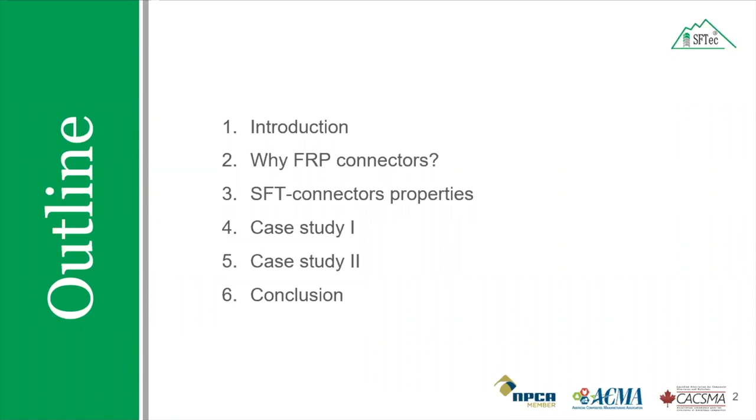Thank you, Rick, for the brief introduction. Let's start with today's presentation. It is a very short webinar on the introduction to fiber reinforced polymer connectors. Through this presentation, I will give a brief overview of the properties of SFTec connectors and its application, and I will go through 2 case studies to elaborate its present uses.

Before starting our main presentation, I would like to introduce our company, SFTec. Our products are mostly designed in Canada and manufactured in China by Sandok Industries Co. Limited, who specialize in manufacturing fiber reinforced polymer products. We work with national and international engineering firms, through the design process, helping them with fiber reinforced polymer design standards, whether in Canada or the United States. Our focus is on parking facilities, water treatment plants, retaining walls, mainly made of glass fiber reinforced polymers, and also carbon strap applications.

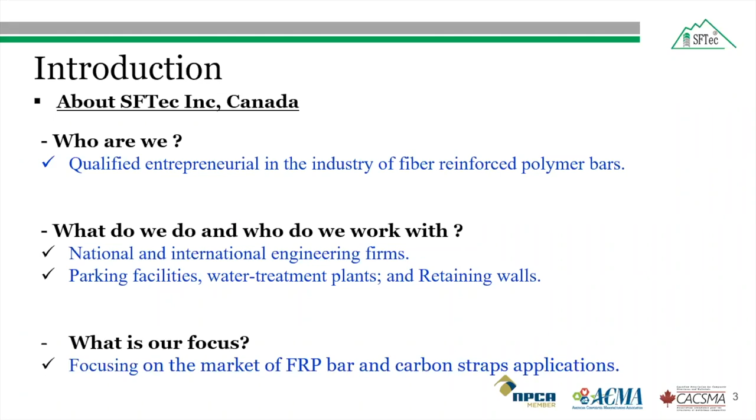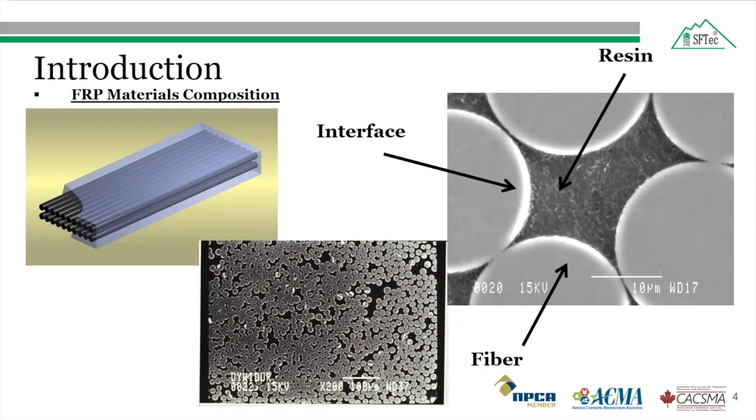The SFTec FRP bar is made of composite materials, either fiberglass or carbon fiber. It is manufactured by a process called pultrusion using a mix of recycled fiber and resins. Here the figure shows a microscopic view of the FRP bar.

There are 3 different types of fiber reinforced polymer bars available in the market. Now it is 4, but I am presenting only 3 here: carbon, aramid, and glass. The 4th one is basalt, on which research is still going on. The stress strain plot shows how these FRP bars compare with steel bar. Two points should be noted from this plot: first, glass fiber reinforced polymer has lower strength compared to the other 2 FRP bars; second, the strength of all fiber reinforced polymer bars is higher than the steel bar. However, their behavior is linear elastic up to failure.

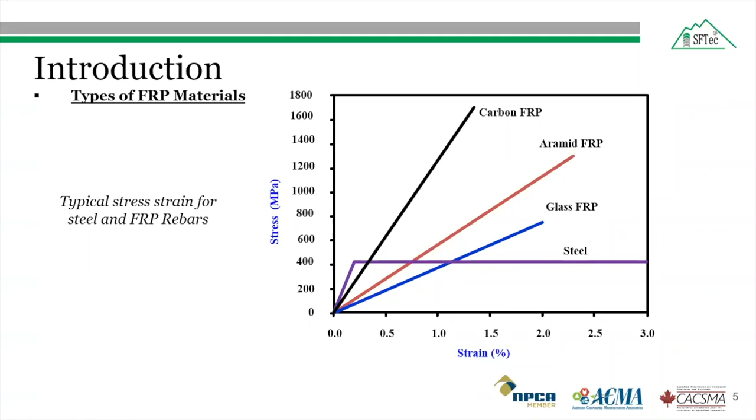In our products, we have different types of FRP products depending on project requirements. Some of the FRP bars we produce are straight bars, spiral, and stirrups for transverse reinforcement, bent bars, and glass fiber reinforced polymer shear connector, which is the topic of today's talk. The glass fiber reinforced polymer bar is widely used due to its production cost and better tensile strain compared to the other fiber reinforced polymer bars. That's why most of our products are made from glass fibers.

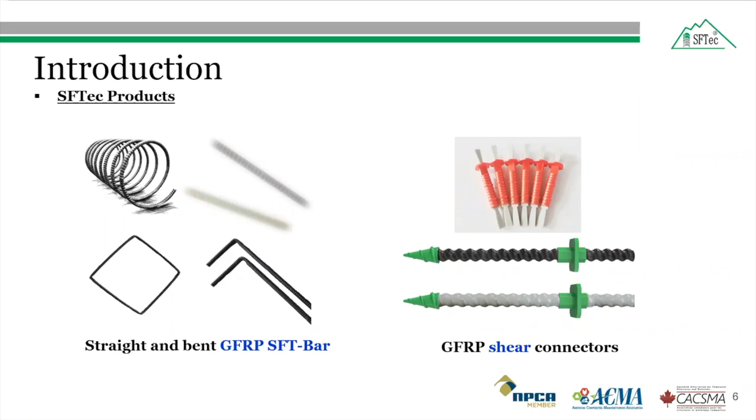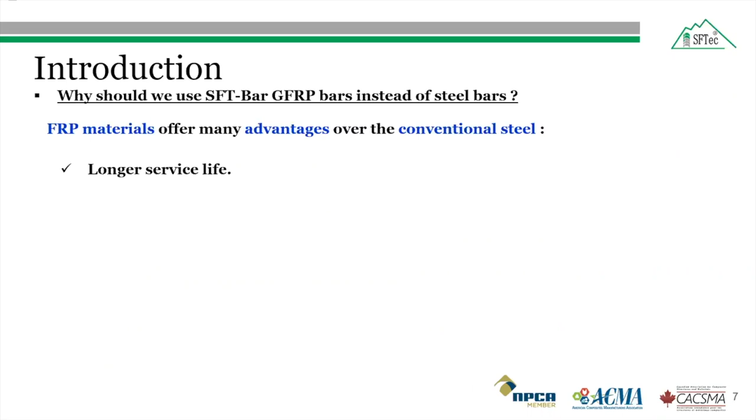Some of the advantages of the SFTec glass fiber bar over conventional steel bars are: it has a longer service life because of its corrosion resistance and therefore improved durability in harsh marine environments, such as construction near coastal areas, and in North America's cold climate.

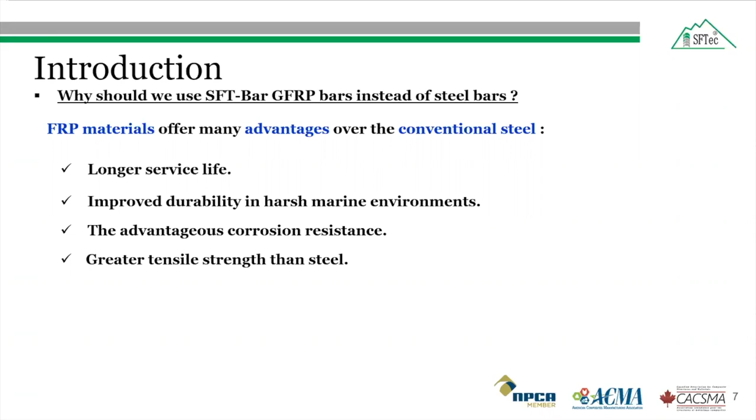The FRP bars have better resistance against corrosion compared to the steel bars. As mentioned earlier, the tensile strength of the FRP bars is 2 to 3 times more than that of the steel bar. FRP bars are also lighter due to their low density compared to steel bar.

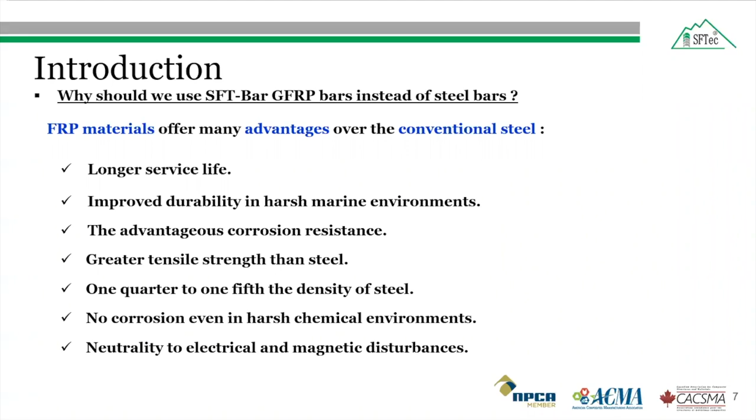Due to corrosion resistance, FRP bars are good for harsh chemical environments as well. They are also neutral to electrical and magnetic disturbances, making them useful for applications such as airports, military applications, MRI rooms, and hospitals.

Some selected field applications of SFTec FRP bars we have already done in Canada include a GFRP reinforced concrete waffle flooring slab designed with SFTec glass fiber reinforced polymer bar, which was built last year in Halifax, Nova Scotia.

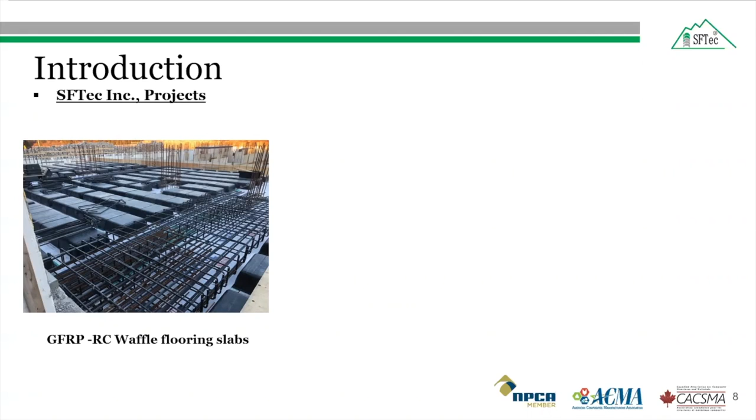It can also be used for slab on grade. It is a non-structural slab, not a one-to-one replacement, and it saves a lot of money compared to the steel bar in terms of labor and transportation.

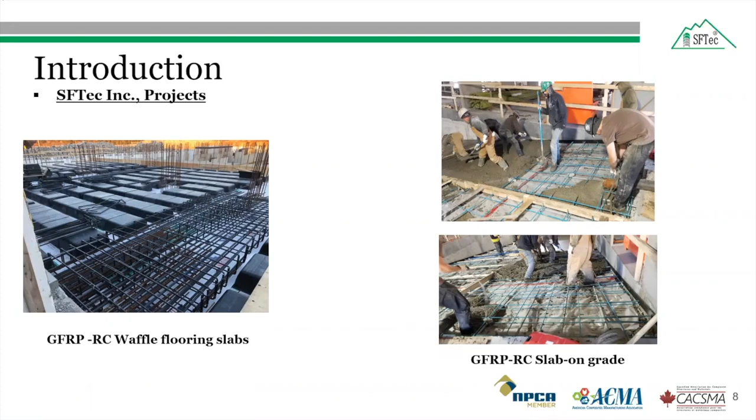Another project shows cast in situ precast sandwich panels, where they used our glass fiber reinforced polymer bars as reinforcement. This was built in China.

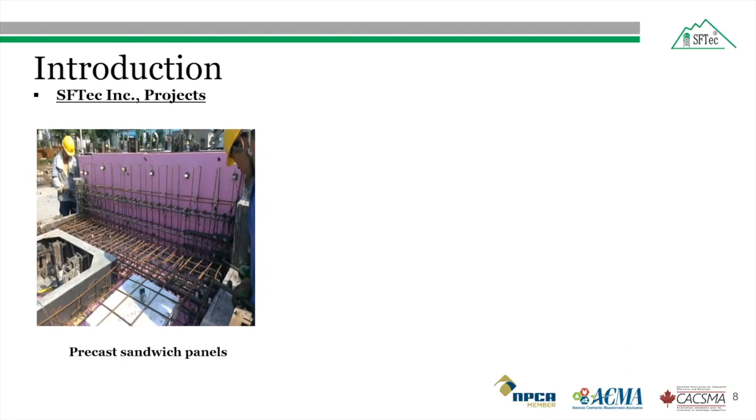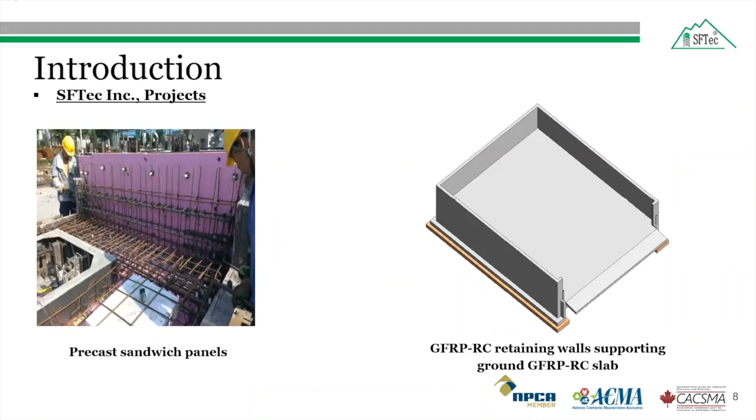On the right is a retaining wall built for the city of Montreal, designed to hold snow with de-icing salts during the winter. They built this retaining wall with SFTec glass fiber reinforced polymer bar, which provided resistance against the chemicals used in the de-icing salts.

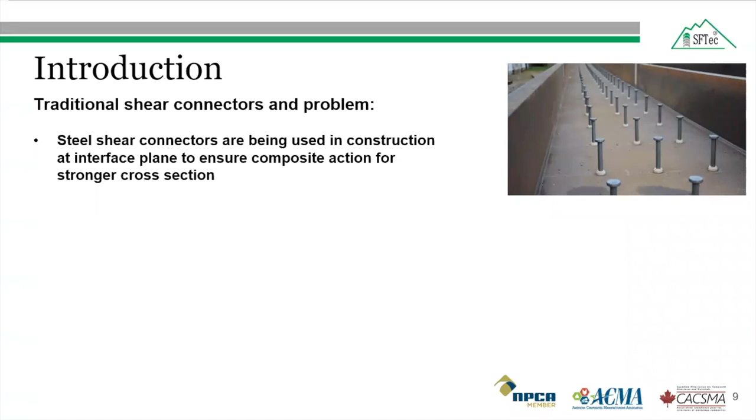Traditional steel shear connectors, also called studs, are used in bridge construction at the interface between the cast in place deck slab and the precast girder to ensure composite action for a stronger cross section. But as we know, in North American countries, bridge deck slabs corrode over time due to environmental conditions.

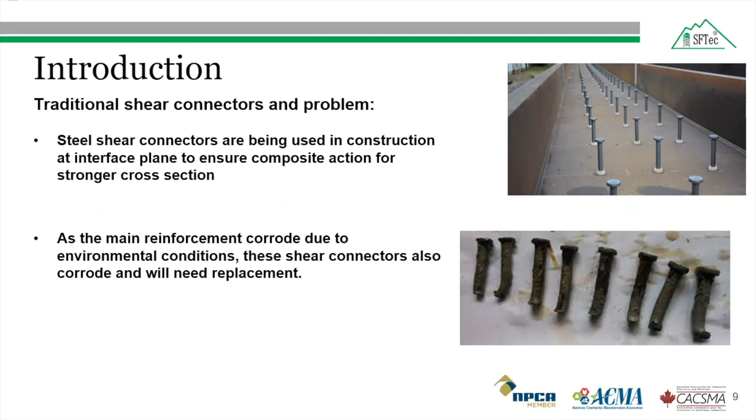These shear connectors also corrode and will need replacement, especially in Canadian winters where de-icing salt is used. The corrosion of steel shear connectors results in gradual loss of composite behavior and strength of the composite action. So fiber reinforced polymer connectors have shown to be an effective alternative to conventional steel connectors due to their resistance against corrosion.

It is lightweight, non-conductive, and magnetic free. We'll discuss why the non-conductivity of FRP is helpful.

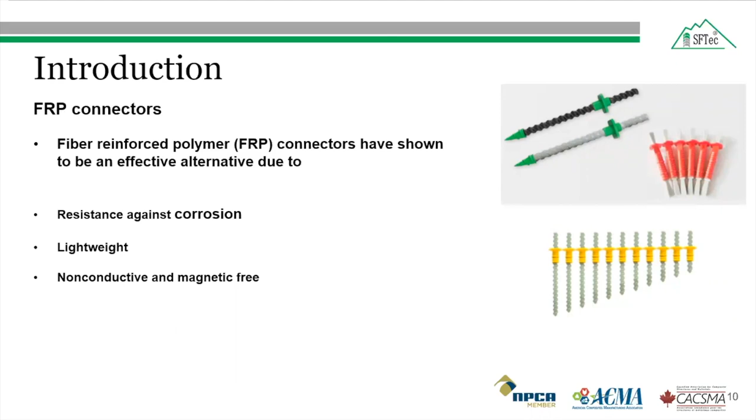With SF-Tech connectors, we generally have 3 different types. Type 1 is the SF-Tech thread connector, with a tensile strength of 700 megapascal, 180 megapascal shear strength, and tensile modulus of 65 gigapascal.

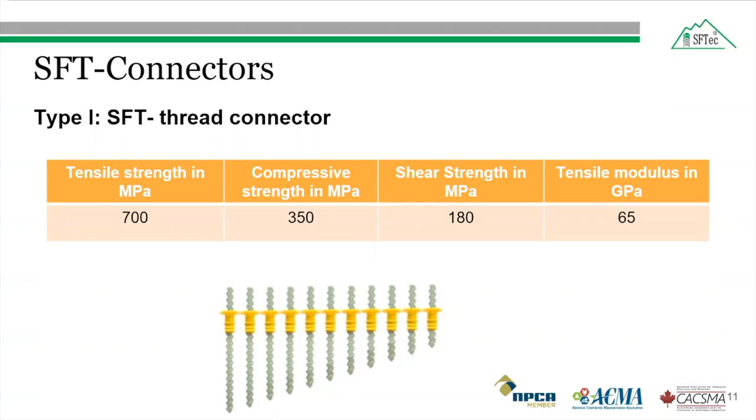The second type of SF-Tech connector is the SF-Tech flat bar, with tensile strength of 600 megapascal, shear strength of 120 megapascal, and tensile modulus of 45 gigapascal.

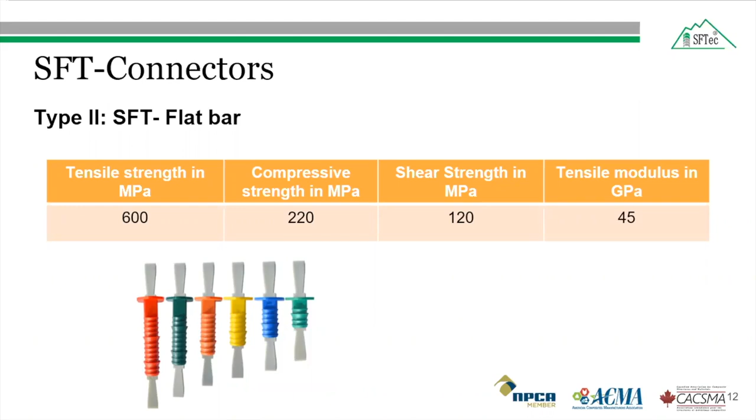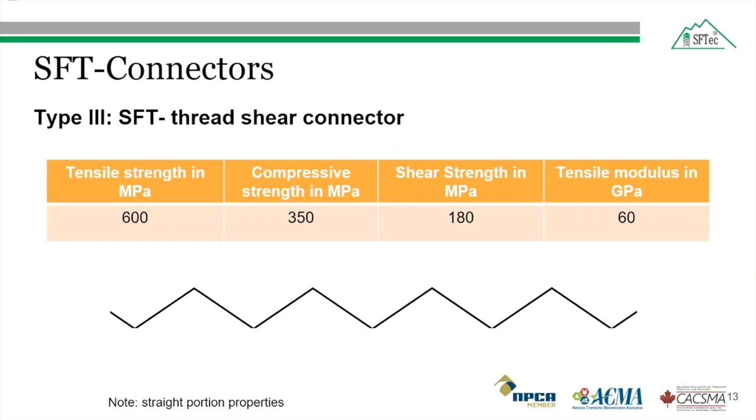Finally, the third type is the SF-Tech thread shear connector, which has a tensile strength of 600 megapascal and tensile modulus of 60 gigapascal. Its structure is like a truss. It is worth mentioning that all SF-Tech connectors are made of fiberglass.

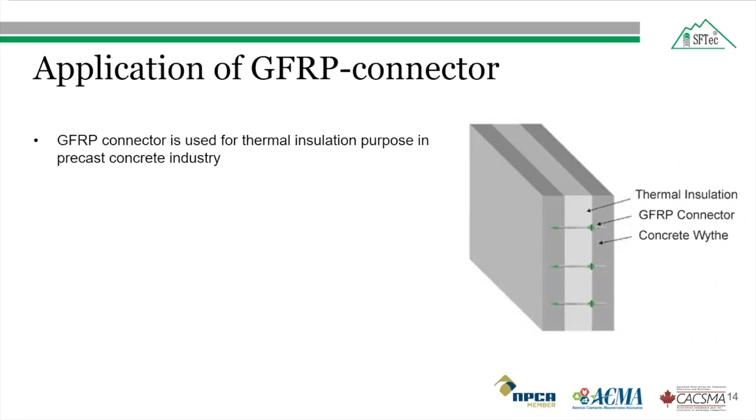The GFRP connectors are used for thermal insulation purposes in the precast concrete industry, such as plant precast and cast in place projects. The precast concrete sandwich wall is composed of an inside layer, outside layer, and thermal insulation, which is generally between the 2 concrete wythes.

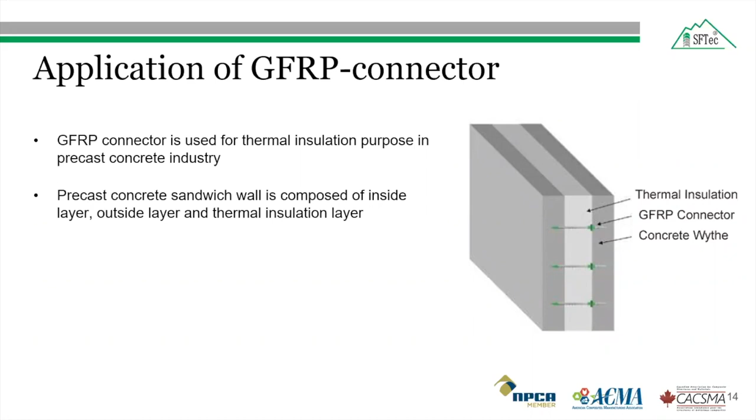The FRP thermal insulation connectors are used to connect these 3 layers, and they can not only bear the weight of the insulation and outside layer, but also bear wind load, earthquake load, and other kinds of loads.

There are two cases presented today: one deals with the thermal resistance of the GFRP connectors, and the other with the shear capacity.

The first case study is about the experimental investigation of thermal properties of insulated concrete sandwich panels with fiberglass shear connectors. As we know, increasing economic and environmental cost of space heating and cooling have generated renewed interest in improving the thermal resistance of building envelopes.

At the same time, rising construction costs are driving designers to select prefabricated elements which can be constructed with higher quality control and in less time than traditional construction. Precast concrete sandwich panels, also known as insulated concrete walls, are thermally efficient prefabricated elements that can address both of these needs.

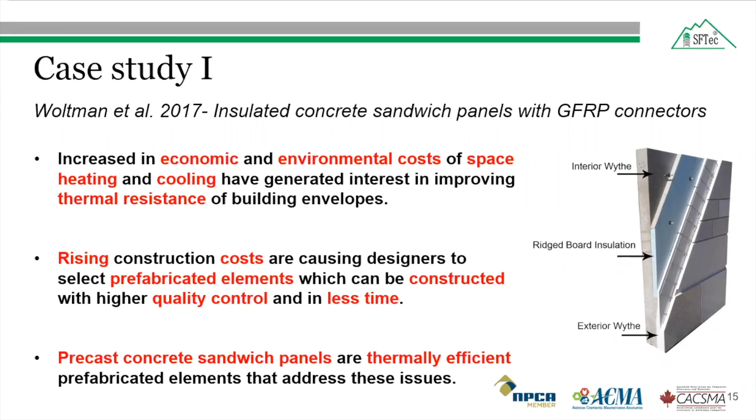Steel connectors are widely used in the industry, but also have the highest thermal conductivity of the connector materials available. Concrete is also used to connect the two wythes in full composite panels. However, a large area of concrete is required, which creates a large thermal bridge.

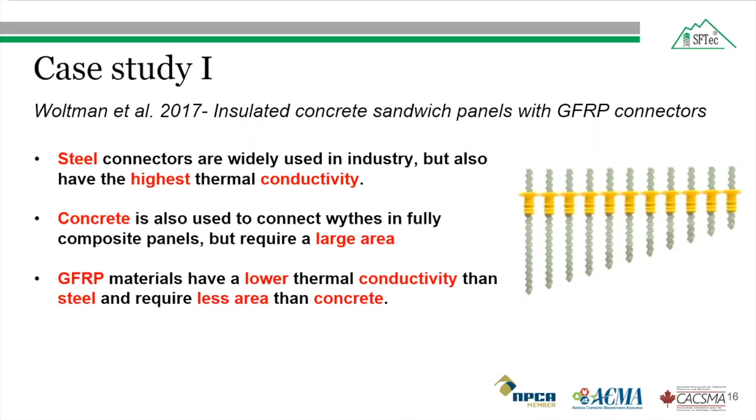Over the past two decades, rising energy prices have encouraged the development of alternatives to traditional steel reinforced design. Glass fiber reinforced polymer, or fiberglass, materials have significantly lower thermal conductivity than steel, generally ranging from 1/60th to 1/30th that of steel, and require less bearing area than concrete to hold the two wythes together. In case study 1, the test setup was a hot box apparatus used to determine the thermal behavior of the insulated concrete sandwich panel.

The test cell had two chambers as shown in this figure: a cold chamber and a hot chamber. The cold chamber, also known as the climate chamber, had a temperature of minus 4.3 degrees Celsius. The other chamber, the hot chamber, also called the metering chamber, was at room temperature of 25 degrees Celsius.

Both chambers were made up of precast concrete box culverts with octagonal cross section, as shown in this figure. The space between these two chambers is adjustable for various thicknesses of the test panels.

This sandwich panel is the test specimen used for testing, and a circulating fan, adjacent to the heater, was used to increase the air velocity inside the hot chamber so that the air velocity was consistent across the surface of the panel.

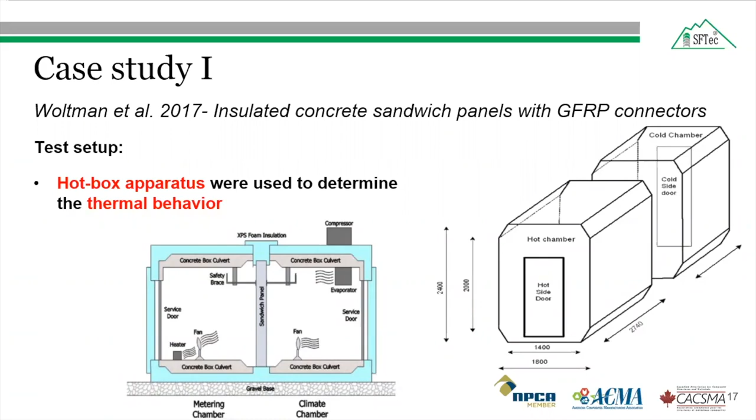The test panels, as shown in this figure, had two wythes, one exterior and one interior, separated by insulation foam and shear connectors. The shear connectors were used to connect the two wythes, passing through the concrete studs.

The back of each chamber in the hot box apparatus was left open to allow the test panel to be installed. This figure shows how the test panels were installed inside the hot box.

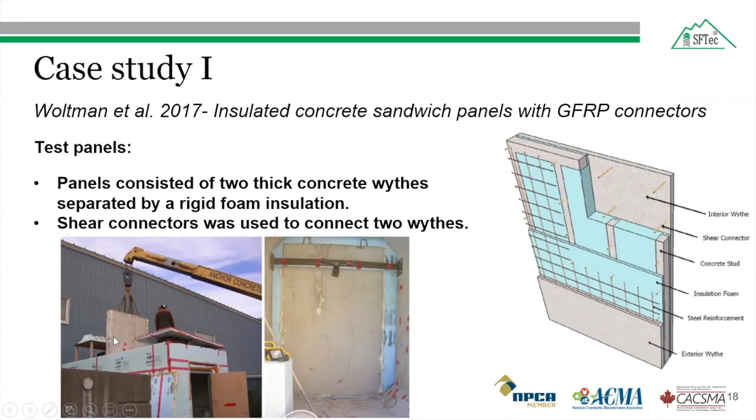The thermal resistance, or R value, is the ability of the insulation material to resist heat flow. The R value of each specimen, in square meter Kelvin per watt, can be determined from the average surface temperatures of the hot and cold sides of the panels and the amount of heat received from the metering or hot chamber.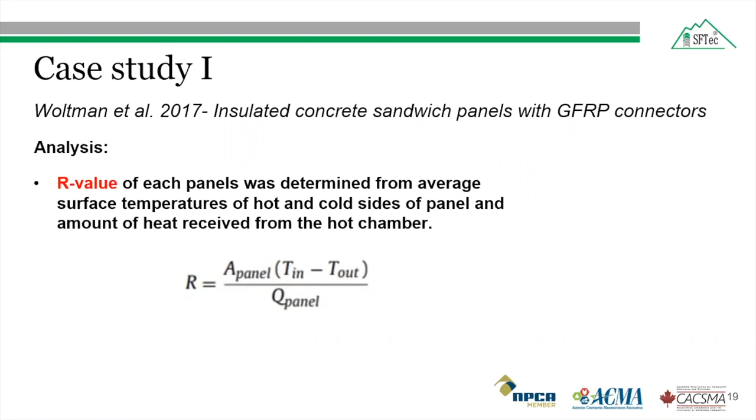In this equation, A panel is the area of the test panel, T in and T out are the surface temperatures facing the hot and cold chambers, and Q panel is the heat received by the tested wall.

Now coming to the results from case study 1, two panels were constructed with similar numbers and dimensions of shear connectors. One was reinforced with steel connectors, the other with GFRP connectors.

The GFRP connector panels, or fiberglass shear connector panels, were found to provide equivalent or better thermal resistance than the counterpart steel connector panels, due to the lower thermal conductivity of the glass fiber reinforced polymer compared to steel, which minimized the effect of thermal bridging.

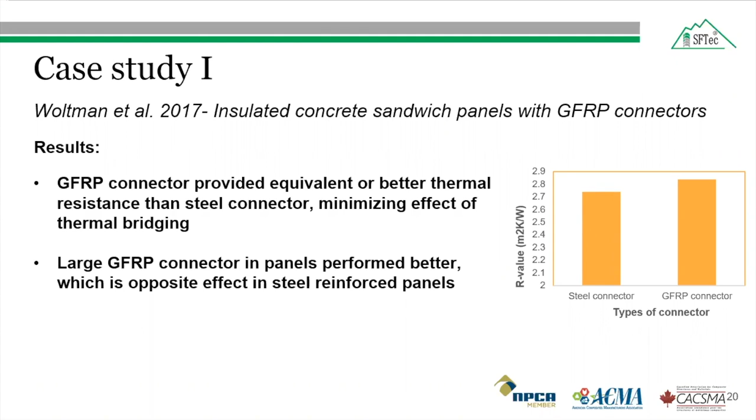The other conclusion drawn from this study was that the large glass fiber reinforced polymer connector panel resulted in a 60% increase in thermal resistance compared to the control panel, which is the steel panel reinforced with steel connectors. This result is the opposite of what we expected for steel reinforced panels, as increased connector area of steel would lead to more thermal bridging because steel has very good conductivity.

Now the second case study talks about the in-plane shear behavior of insulated precast concrete sandwich panels reinforced with corrugated GFRP connectors. As I told earlier, insulated precast concrete sandwich panel systems are widely used commercially due to their economic advantages and superior thermal and structural efficiency.

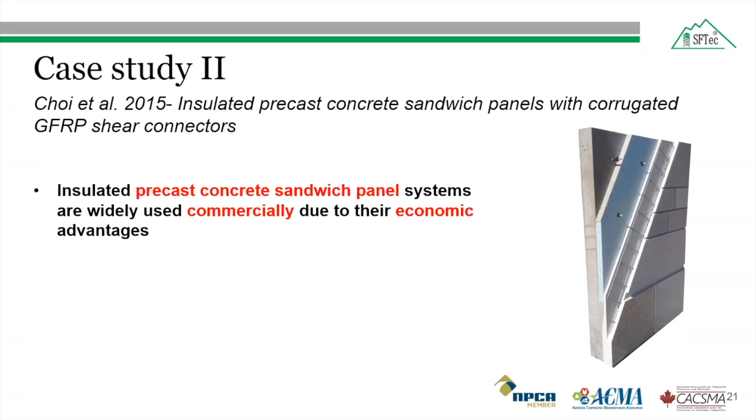As discussed, the panel consists of exterior and interior precast concrete panels separated by a layer of rigid foam insulation. The presence of the insulating layer enhances the thermal efficiency of the precast concrete sandwich panel system. The two discrete thin concrete wythes help resist applied load by changing the shear transfer mechanism of a conventional concrete wall panel. The figure below shows the glass fiber reinforced polymer shear connector that incorporates a 45-degree angle to the shear plane and is 5 millimeters thick.

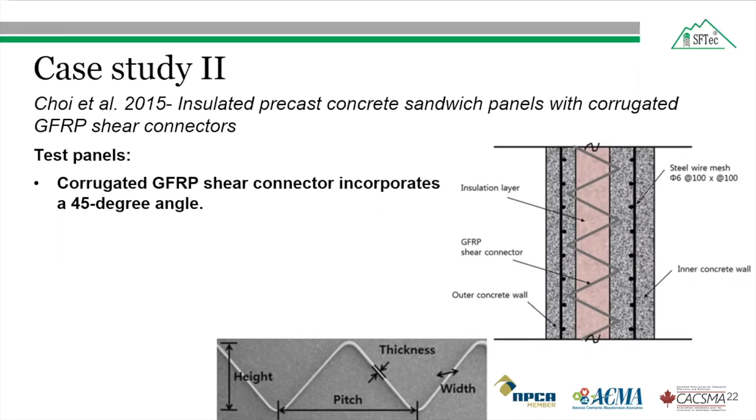A variable of the GFRP connector was used to investigate the toughness of the glass fiber reinforced polymer shear connector, varying its pitch, height, and width. The specimens were supported vertically at the bottom edges of the two concrete outer wythes on steel blocks.

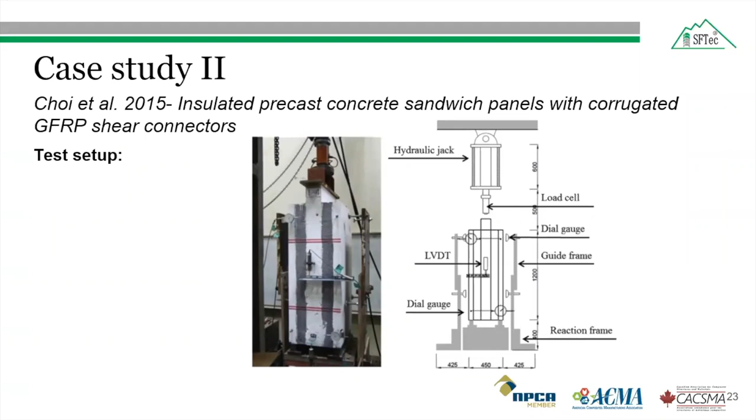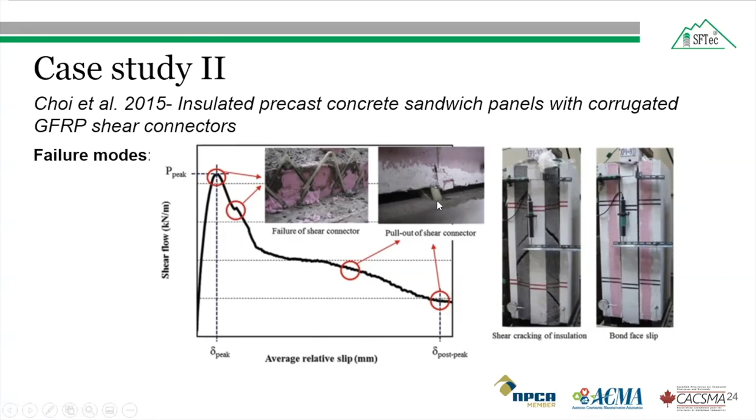A vertical load was applied through the load cell and steel block in line with a 1000 kilonewton hydraulic jack to the top surface of the inner concrete wythe to produce direct shear force across the interfaces. The failure mode after the test showed the strength of the panel reduced after maximum loading, followed by failure of the shear connector, with shear cracks in the insulation and delamination of the concrete and insulation observed. As the rate of displacement increased, the load gradually decreased. The specimen failed with pullout of the shear connectors when the embedded length was not long enough.

The results drawn from case study 2 were: the variable of the GFRP connector was used to investigate the toughness of the GFRP shear connector, its pitch and width. An increase in the width of the corrugated GFRP shear connectors tends to increase the stiffness and strength of the specimen, and with an increase in the pitch, the in-plane shear strength increases, resulting in higher tensile strength of the shear connectors.

So from these two case studies, what we found is that in the first case study, the thermal resistance of the GFRP connectors is better than the steel counterpart. Even with an increased or larger size of GFRP connector used, it will provide better thermal resistance compared to steel connectors.

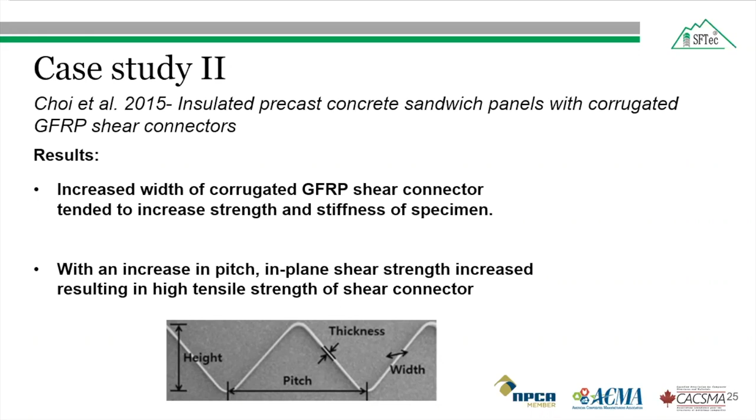And in the second, the shear strength of the GFRP connectors provides better insight into how much pitch, width, and height of the GFRP connector should be used in the precast sandwich wall so that it can provide efficient or sufficient shear strength.

So as I told earlier, we have 3 different types of FRP connectors which can be used for different construction projects, like in insulated walls, slabs, or precast elements, and these bars can be modified according to the project requirement.

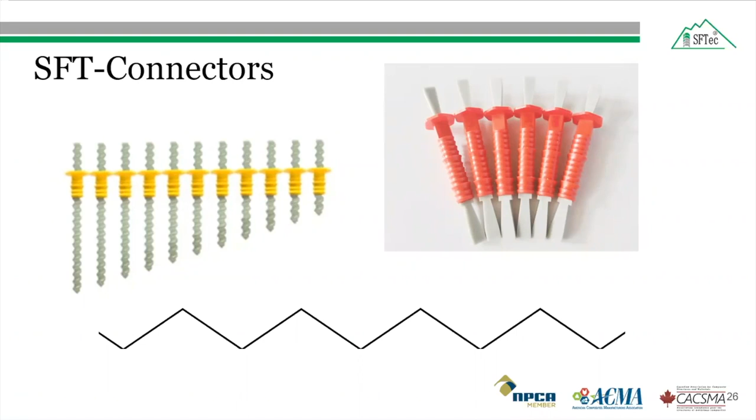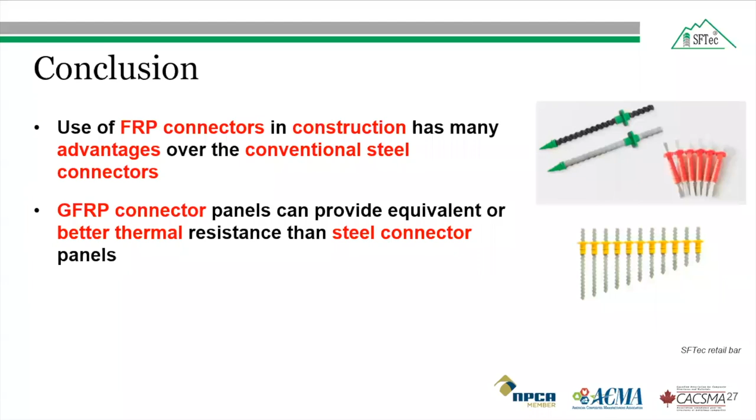So in conclusion, due to the corrosion resistance, lightweight, and magnetic-free nature of FRP connectors, it can be used in construction, replacing conventional steel connectors. GFRP connectors in precast insulated sandwich panels can provide equivalent or better thermal resistance than steel connector panels, due to the low thermal conductivity of GFRP compared to steel.

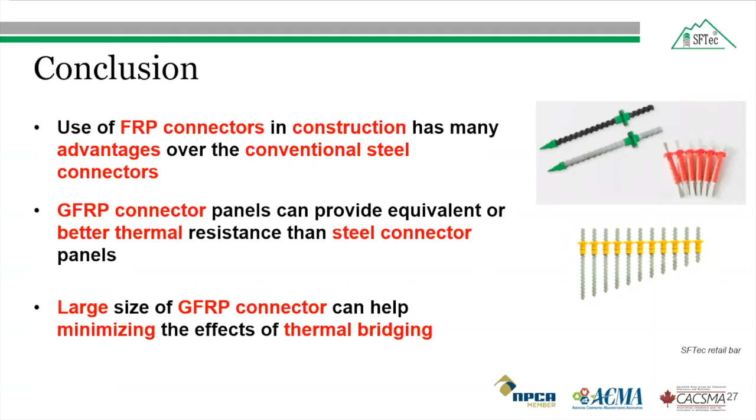And finally, the large size of GFRP connectors in precast insulated panels provides better thermal resistance, which is the opposite effect of what would be expected from steel connectors, as increased steel connector area would lead to more thermal bridging. Thank you very much for your kind attention.